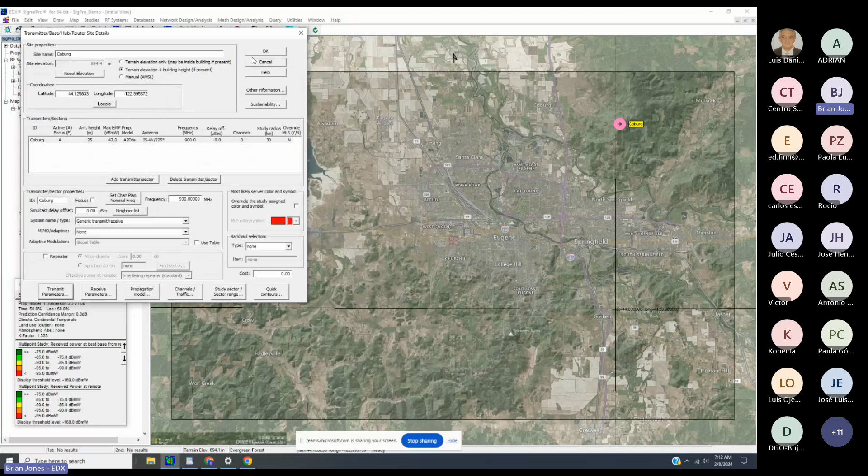In this basic project here, I've got a single site defined, which is a 900 megahertz site, and I can use directional antenna pattern files, which can be 3D files, and define all of the different parameters of my base stations and the different parts of my network.

And all of that can be placed into the map here, either by hand. I can place sites on the map based on templates this way, or I can go ahead and place sites on the map using spreadsheets where I can just copy and paste or import large lists of locations in. And then based on that, we can set up studies to show, for example, point-to-point link planning.

If I want to look at a single microwave link, I can define all of those parameters, and then I can run path profile studies to look at the link performance and reliability.

If I'm working with a mobile or nomadic sort of area-wide system, I can also set up and run heat maps or what we call area studies, grid-based maps of coverage and performance.

And the basic Signal Pro includes studies that are agnostic in terms of technology. So any of the basic studies here would be included with the Signal Pro package, and they're applicable to any frequency band and any technology.

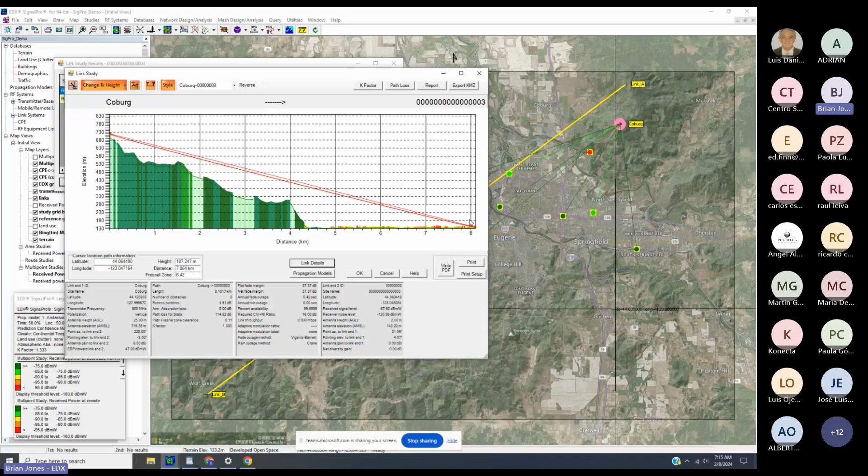And here I may have tens of thousands of subscribers, or as Luis said, for either multi-point or mesh projects, we can support up to millions of endpoints or subscriber devices. So these multi-point studies would be applicable for utilities and smart cities cases, as well as fixed wireless access, FWA, last mile delivery to homes and businesses. Any of those use cases are, Signal Pro is a strong solution for those use cases.

So a quick word about the mapping data. EDX offers terrain elevation, land use, land cover data, and also 3D polygon building data if needed. We offer subscription as well as custom data set offerings for just your area of interest, but we do not lock you down to a single data set. If you have your own GIS data, we have conversion tools for bringing that into the software and then basing the RF models on that.

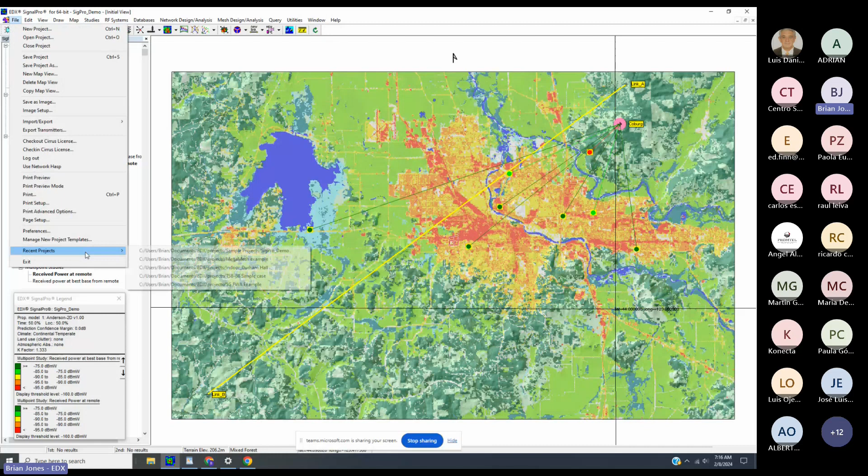Let me go ahead and move on to a mesh project. This example is going to be an automatic metering example. So each of the endpoints here is an electric meter at a home.

And if I zoom out here a little bit, you can see I have some gateway sites. This 981 site and this 427 site are like my collectors for that mesh network. Each one of these nodes, or electric meters, and the repeaters represented by triangles, they can communicate with any of the nodes around them based on the link budget that we predict for that path.

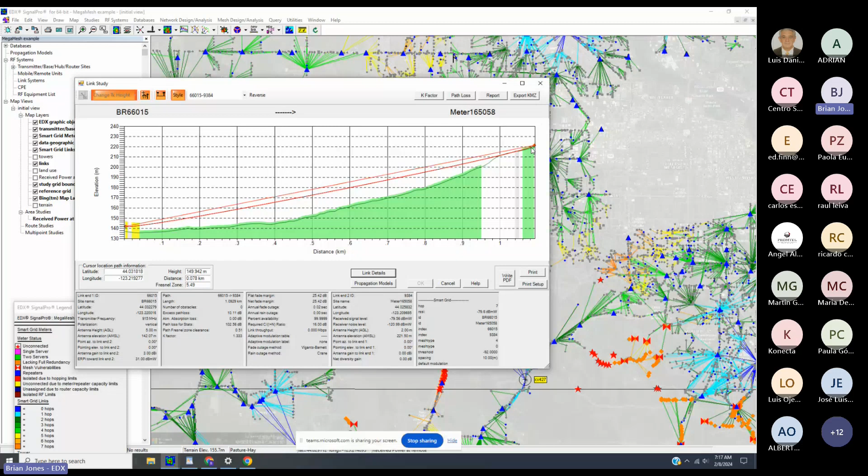So for example, this meter out here is making a rather long hop up to this repeater. If I want to look at that particular hop, I can go and evaluate the link path and the link budget, and I can see, oh, that's why that's able to make such a long link - it's line of sight. Our mesh module, again, is scalable up to millions of endpoints and thousands of collectors.

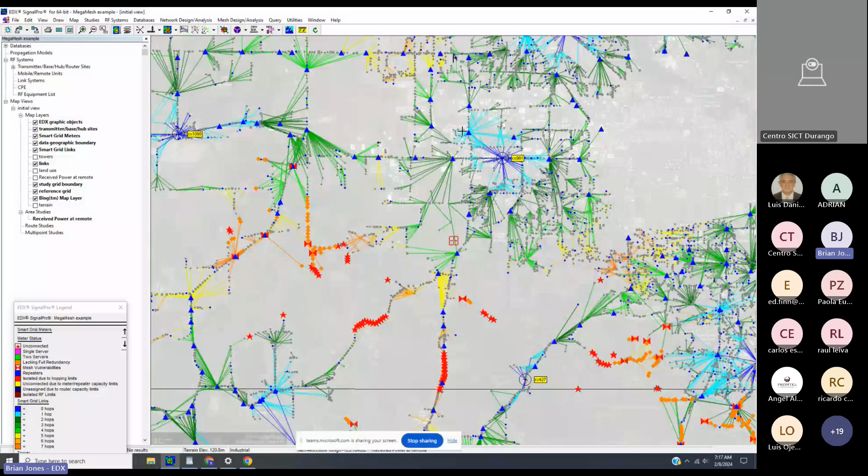We have automatic site selection tools as well as repeater selection tools. So if your customer comes to you with a list of locations or an area to be served, you can input all of the places where you could put a base station or a repeater. The software will help you in finding the lowest cost, best bottom line solution to get to the coverage metrics that you need. And again, that's applicable for mesh technologies like this, but also multi-point and mobile technologies as well.

Another thing that the mesh module can do in Signal Pro is identify redundancy in a mesh network. So one of the strengths of mesh for critical communications, such as power grid distribution, with many possible interconnections between the mesh nodes, the system is very resilient against failure. If one device goes down, it's likely that the devices will be able to route around that failure.

Signal Pro's mesh module is the only software on the market that can not only calculate those likely mesh hopping paths back to the collector, which is what we're seeing here with these link lines, but we can also identify failures in that redundancy. So these sort of sideways hourglass symbols here, these red symbols, represent devices that if they went offline, devices around them would not have any path back to the gateway.

So this orange diamond symbol represents vulnerable meters that could be knocked offline if this one device went down. And these single points of failure, or what we call cut nodes, represent a location that you would want to make a backup device. So if our customer's doing power grid distribution or security cameras or something else really critical, what they would do is come in, and everywhere there's a cut node like this, they would add a backup so that all of those devices have an alternate path back to the gateway.

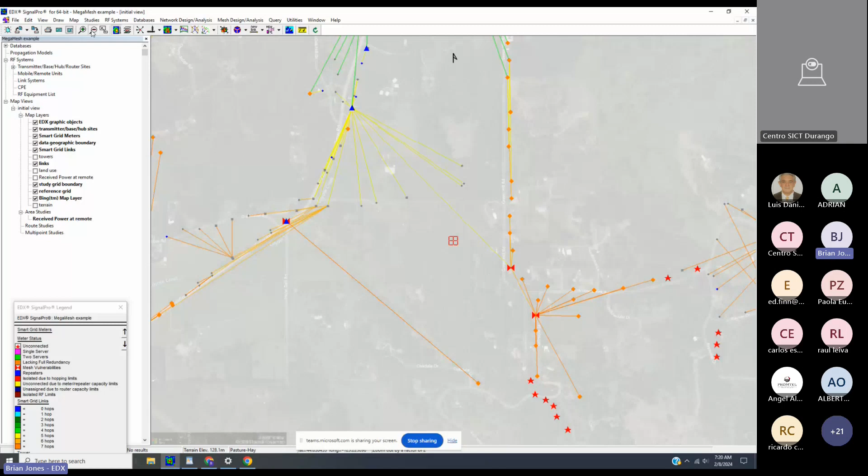So EDX has been working with mesh technologies and designing this planning software around mesh for nearly 15 years now, and it's the most advanced mesh planning software on the market. But Signal Pro itself is also an extremely versatile, flexible tool for looking at a whole variety of different use cases, including...

...public safety. We have a whole set of studies in here specifically for public safety land mobile systems that are recommended by the TIA and are sort of the most advanced studies for that type of technology on the market. And again, with the addition of our technology modules for LTE or 5G or Wi-Fi, we can really support any of the emerging broadband technologies, including proprietary technologies like Cambium or Ubiquiti.

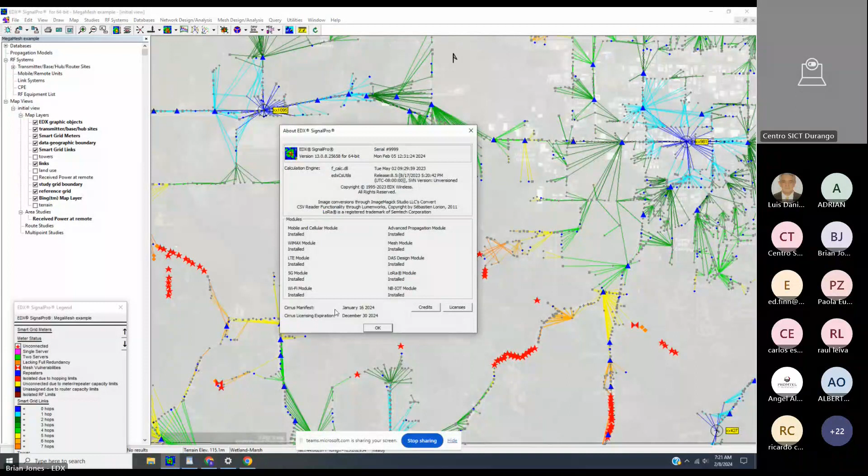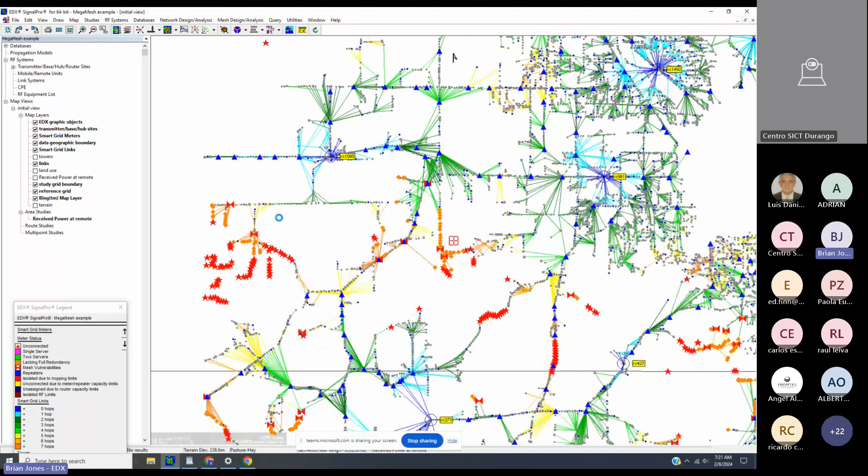We can plan them even in the same project. You can have different types of technologies and different use cases within one Signal Pro project so that you can support all of the various communications needs of a utility, municipality or city - whatever your application might be.

I'd like to stop right there. Luis or Ed, is there anything I'm leaving?

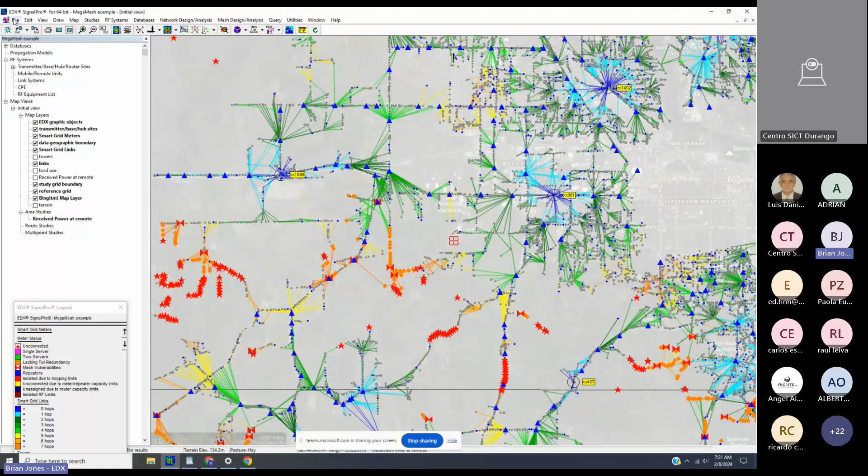Can you, before I stop, move sharing onto an in-building example? Let me go to my slides. Sorry, I had some inconvenience, I had to exit and re-enter.

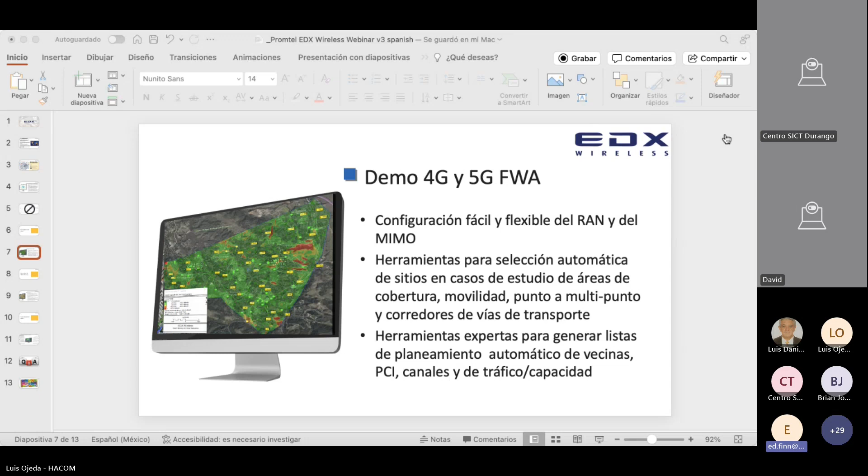While you're working on that, I just wanted to add, Brian, you asked to make a comment if something may be missed. I think it's worth accentuating what you had shown there. I think it's very important for the audience to know that this solution not only designs for optimized network coverage and capacity, but provides a tool that allows you to deploy a solution with the most efficient network and the level of resiliency you need to achieve customer satisfaction and maintain quality of service. It's a very powerful business tool as well as a technology tool to deliver the performance and efficiency you likely need in operating your network. I think that's very important to call out, and I just wanted to reiterate that.

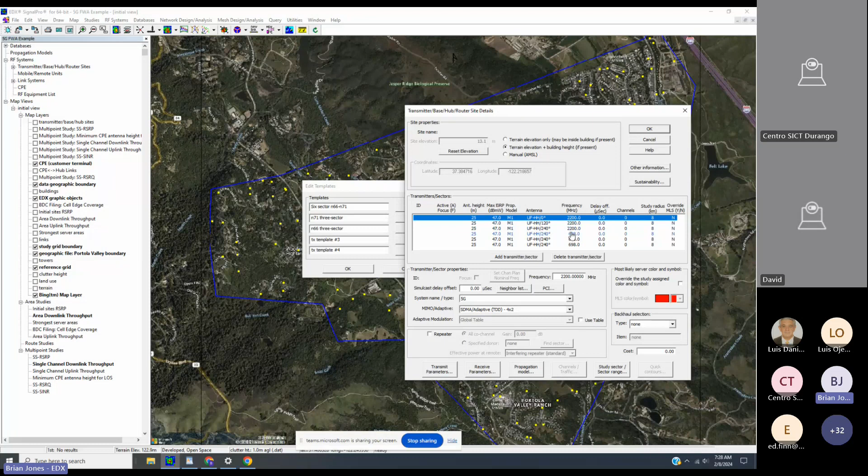So using the 5G module, what I first do is set up the template for my base station. Signal Pro can support multiple different bands in the same project for LTE, 5G, Wi-Fi, or any other technology. In this case, I've got either a 2.2 gigahertz or a 700 megahertz band, and these are 3-sectored sites that I've set up as the default.

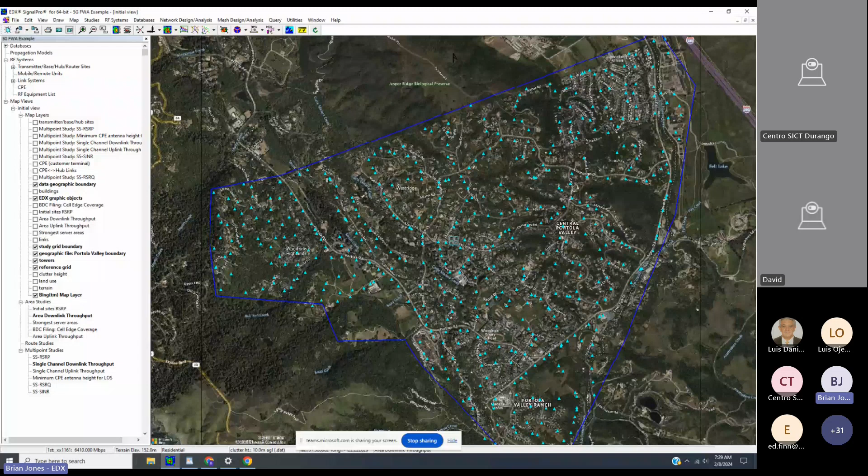And then I've plugged in my tower and poles database here. This includes their heights and also the relative costs to deploy on those towers. I can say, okay, I'm trying to reach 90 or 95% of the subscribers, and it selects from those towers to give me these base stations according to the coverage metrics I wanted and the percent of subscribers I was trying to reach.

And then once we have those site locations selected, I can generate heat maps for generalized coverage over the area. You'll notice this is the downlink throughput in megabits per second. If you look at the bottom left, when I mouse over the screen, this is predicted megabits per second for my 5G system.

I've defined the particulars of that 5G system within my site properties. I've got a 4x2 MIMO on my sectors, and the rest of those details are here, where we can set up the frequency band, subcarrier spacing, bandwidth, etc. This is the simple setup dialog. If I'm just doing a single band, a single technology, I only have to go here.

If I want to do a more complex RAN setup, maybe with several different pieces of spectrum to work with, then I can go under technology profiles and set up as many different profiles as I want for this project.

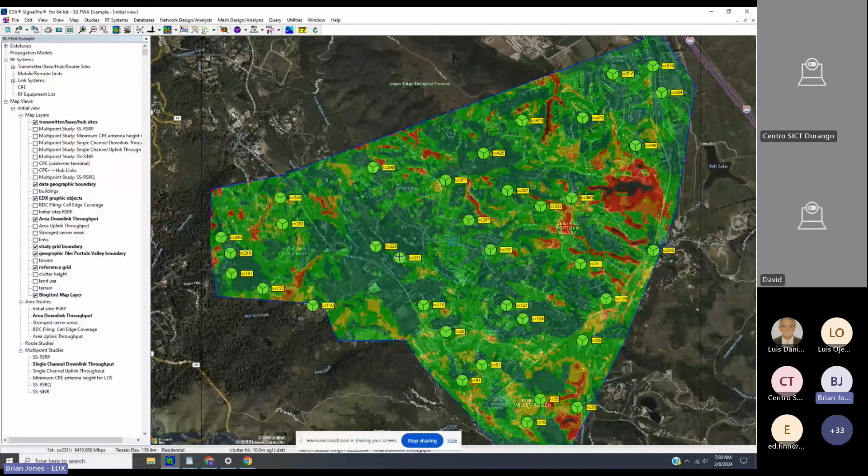Once I have a design that I'm happy with in terms of the coverage, both area coverage, or I can do point to multi-point if I want to look at the coverage or throughput to a specific subscriber location. I can run any of these same studies as point to multi-point. So you can see here for this subscriber, what we predict for that subscriber location.

And then, as Luis said during the slides, we also have tools for PCI code planning so you can come up with a good PCI scheme with no conflicts, and also neighbor list tools and channel planning if needed. So it's really a full toolkit for 5G, and there's a lot of consistency between the different modules.

If I'm working with the LTE module, it's very, very similar in terms of how we set up all the particulars of the technology and how I set up the base station details, link budget details, etc. So once you become proficient with the Pro tool, addressing a new technology or looking at new use cases is really just a matter of making sure you've input the right equipment parameters and are running the right studies.

Yo no lo escucho a Brian. ¿Tú lo escuchas, Luis Daniel? Can you hear me now? Yeah, now we hear you. We didn't hear you at all. Yeah, my mute button was on.

So I've got an indoor project here, and again, one of the strengths of Signal Pro is that you've got a common platform and a common workflow for setting up all kinds of different projects. This project tree on the left-hand side, no matter what kind of project I'm setting up and what sort of data set I'm using, I go from top to bottom, addressing what data I have for each category, and by the time I get down to running studies, I'm all set up with the important settings.

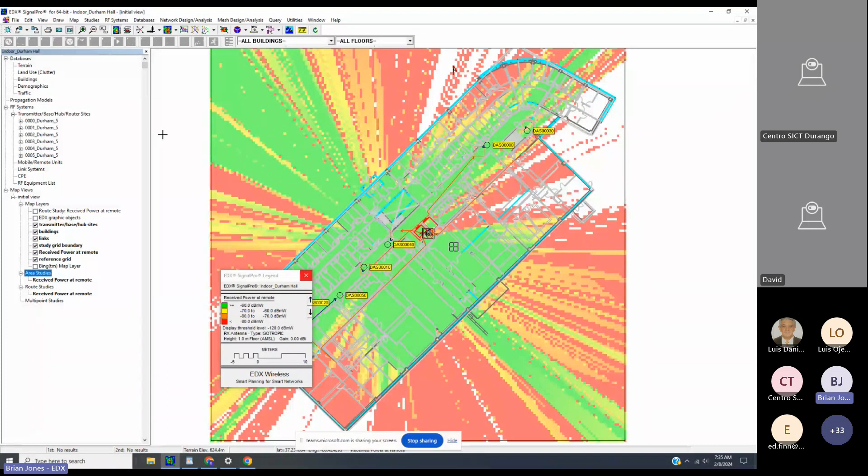In this case, I do have terrain and land use data for the area around this building, but I also started with an AutoCAD model of each of the floors. Our indoor tool is capable of supporting a whole campus of buildings relative to each other. In this example, I've just got a single building. So when I go into my building selection, there's just this Durham 5 building, or different floors of that building.

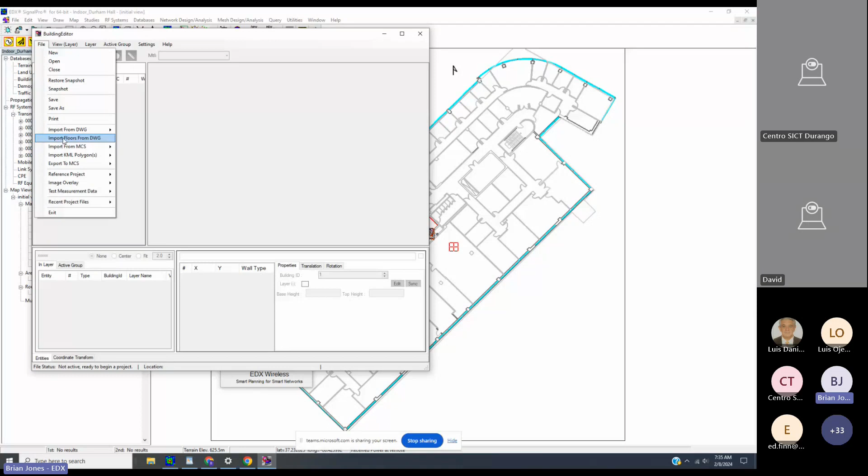This model was created by taking AutoCAD DWG files, and in our building editor tool, you can go ahead and import floors from DWG. That imported each of these 4 files and stacked them on top of each other and extruded them out into 3D. The only other thing you have to do within the building editor is assign different wall types to each of these lines.

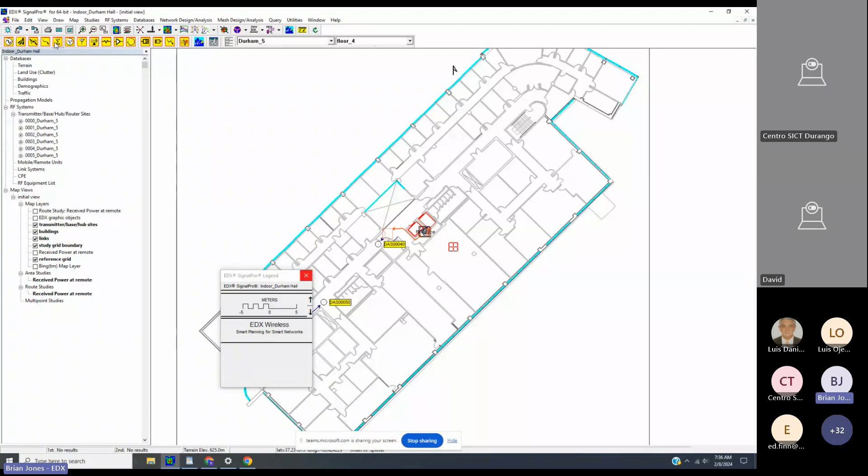These gray lines represent interior plasterboard and stud wall. The red lines indicate metal, where we have the elevator case. And the light blue represents glazing, or the glass on the exterior of the building. You'll notice this yellow toolbar gives me tools for placing indoor antennas and access points, as well as cabling, splitters, and all those sorts of things, so that I can do complex designs in the building. Once I have those antennas placed, I can go ahead and run my studies.

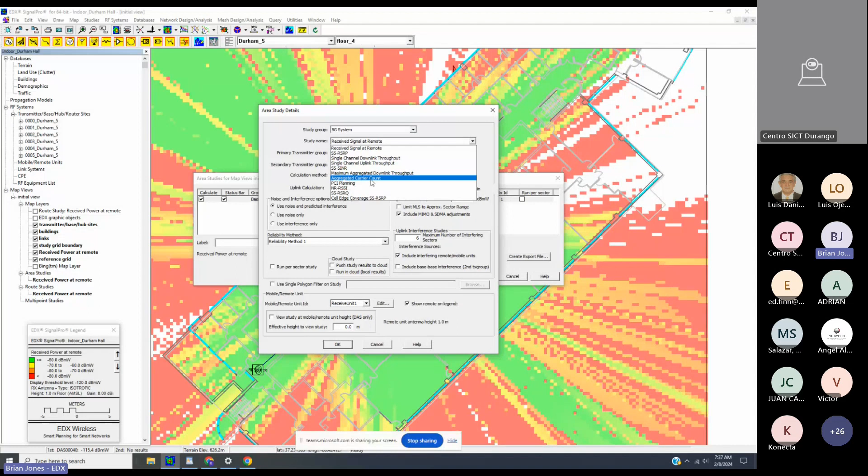If I go ahead and just run my basic receive power at remote study for this floor, it's showing me the coverage I'd get from these 2 antennas. Here again, we can support any technology or any frequency band for these indoor use cases. So if I had Wi-Fi inside the building, I would just go to my Wi-Fi settings and add those studies for data rates, C over I, and so on. If I was using 5G, I can go into 5G systems and set up those studies. And again, I could have a mix of different systems or technologies within this one building or across the campus.

EDX includes propagation models appropriate for a simple indoor use case, or our outdoor propagation model appropriate for campuses and doing coordination between macro outdoor sites and indoor repeater and DAS systems. This is a very important issue for public safety land mobile radio. In a lot of cases, when repeaters go into buildings, there needs to be coordination between the indoor and outdoor systems, and Signal Pro is fully capable of doing that.

We also have, as Luis pointed out, 2D and 3D ray tracing models, which, if you have an accurate, high-detail building model with the different material surfaces represented, can give you very accurate, highly detailed results from this ray tracing. Very often for use cases like hotels, conference centers, and hospitals, most of our users choose the simplified indoor model because it runs very quickly and it's a very robust model. It's easy to tune and adjust, and if your building model isn't exactly perfect, it doesn't matter very much. So our simplified indoor model is very popular, but we also have ray tracing options.

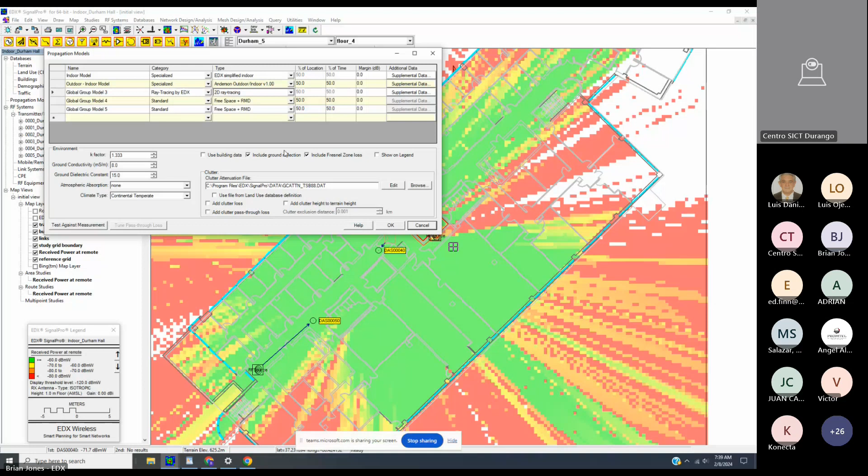For any of these propagation models, whether we're talking about indoor use cases or outdoor systems, we have facilities to bring in field test data and adjust the propagation model to better fit measurements from the field. So this test-against-measurements function would let me bring in walk test data or drive test data and see how closely the model is matching what I find in the field.

Are there any questions on the indoor tool, Luis?

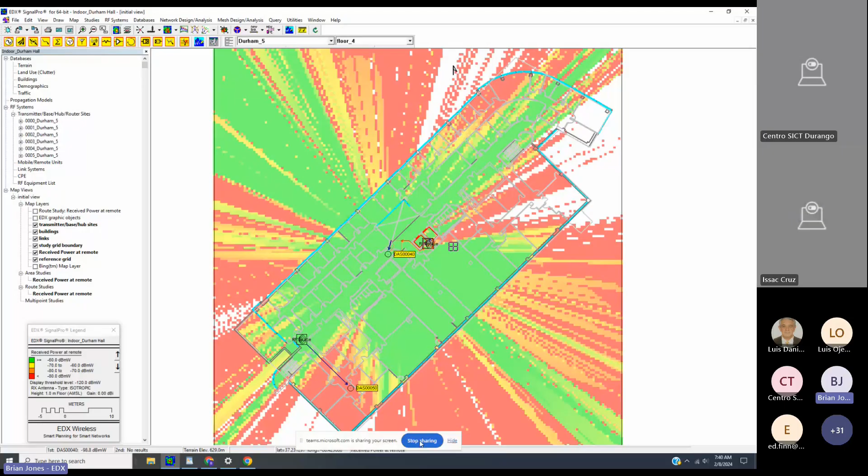Okay, let me share my screen because I want to go to this slide. Also very important. Thank you very much, that was very good.

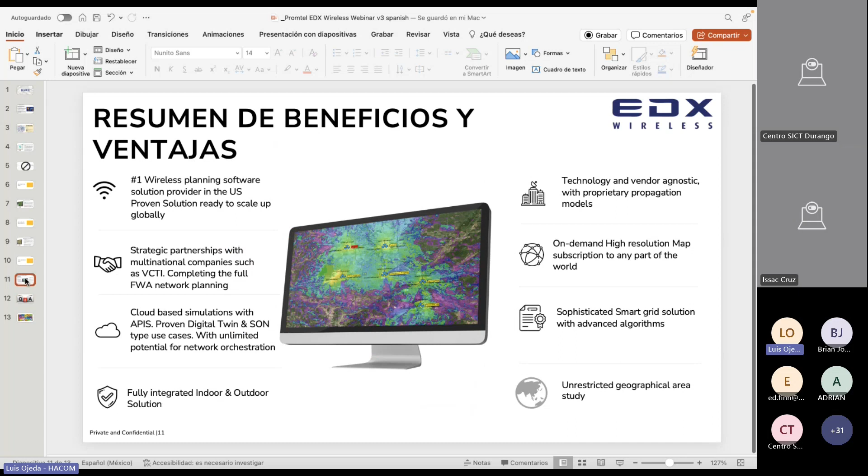Brian, can you help me here and tell us if our propagation models comply with ITU or other standards, FCC, or I believe so. I'm sure it does, but this is a question from the audience.

Yes, we include both ITU-R propagation models as well as FCC propagation models for use in filing with the FCC and that sort of thing. Signal Pro includes both proprietary path models, such as our Anderson 2D and our outdoor-indoor model, but also a whole collection of published empirical models from 3GPP, the ITU, and the FCC.

Okay, in the case of IFT, which is the regulator in Mexico, we wouldn't have any problem adapting or producing the reports for the local requirements, right?

I wouldn't think so. I'd be happy to work with you or anyone to determine exactly what is required for those reports and make sure everything is in the right format and calculated according to their requirements. Okay Brian, let me make a little translation here for those who do not speak English.